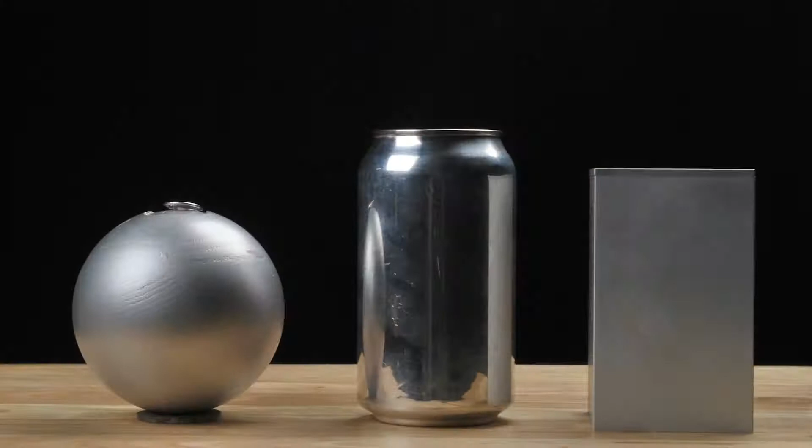But the cuboid surpasses the sphere in packing efficiency. It has almost no wasted space, although at the sacrifice of using more surface area to contain the same volume as the sphere. So, to create a can, engineers use a cylinder, which has elements of both shapes. From the top, it's like a sphere, and from the side, it's like a cuboid. A cylinder has a maximum packing factor of about 91%, not as good as the cuboid, but better than the sphere. Most important of all, the cylinder can be rapidly manufactured.

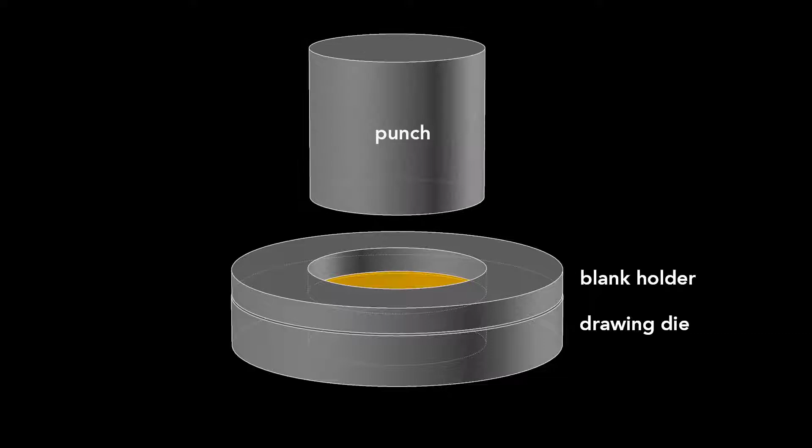The can begins as this disc called a blank, punched from an aluminum sheet about 3/10 of a millimeter thick. The first step starts with a drawing die, on which sits the blank and then a blank holder that rests on top. We'll look at a slice of the die so we can see what's happening. A cylindrical punch presses down on the die, forming the blank into a cup. This process is called drawing.

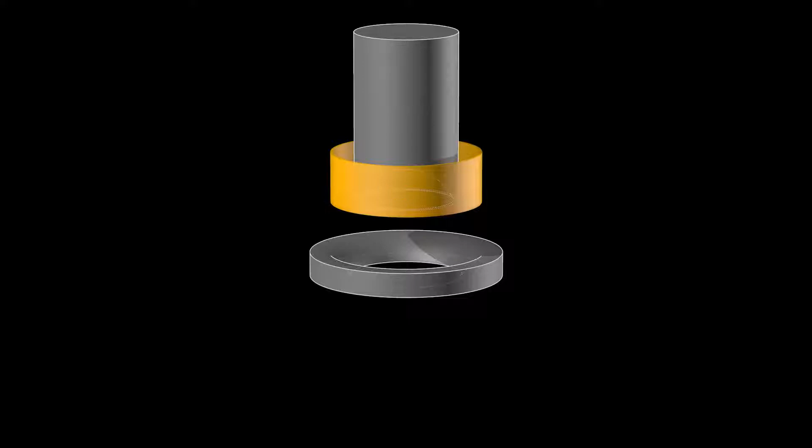This cup is about 88 millimeters in diameter, larger than the final can, so it's redrawn. That process starts with this wide cup and uses another cylindrical punch and a redrawing die. The punch presses the cup through the redrawing die and transforms it into a cup with a narrower diameter, which is a bit taller. This redrawn cup is now the final diameter of the can, 65 millimeters, but it's not yet tall enough. A punch pushes this redrawn cup through an ironing ring.

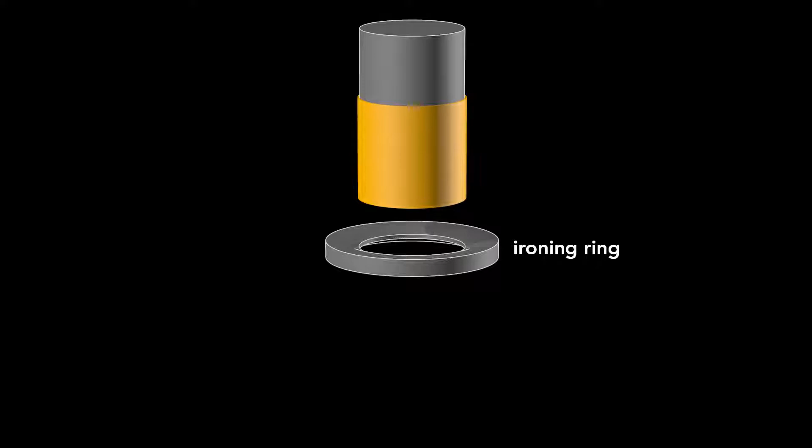The cup stays the same diameter as it becomes taller and the walls thinner. If we watch this process again up close, you see the initial thick wall and then the thinner wall after it's ironed. Ironing occurs in 3 stages, each progressively making the walls thinner and the can taller.

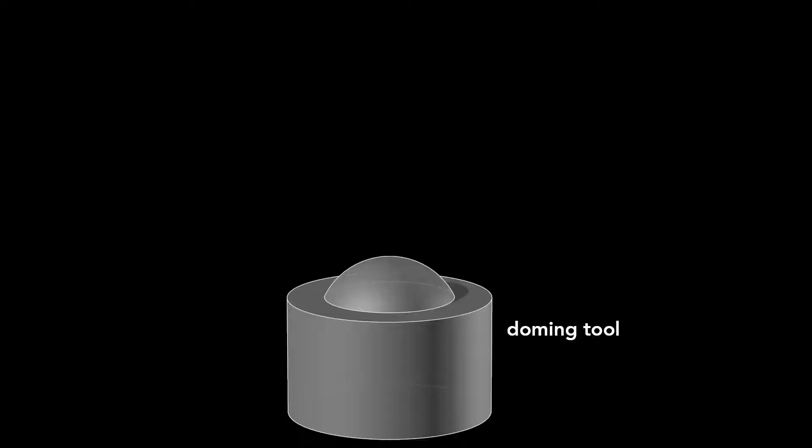After the cup is ironed, the dome on the bottom is formed. This requires a convex doming tool and a punch with a matching concave indentation. As the punch presses the cup downward into the doming tool, the cup bottom then deforms into a dome. That dome reduces the amount of metal needed to manufacture the can. The dome bottom uses less material than if the bottom were flat.

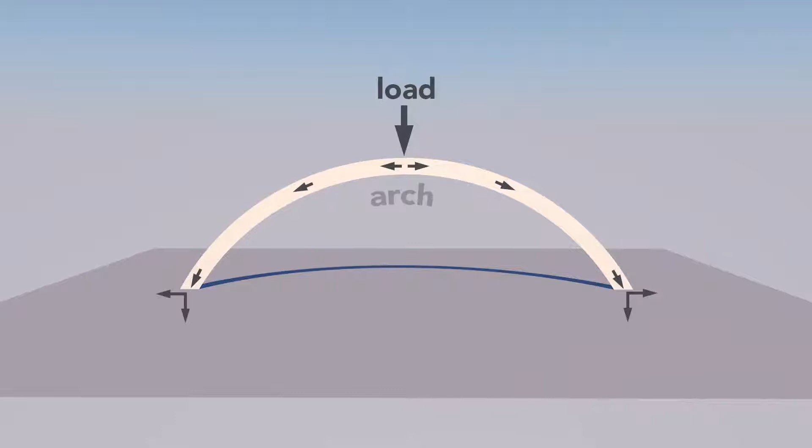A dome is an arch revolved around its center. The curvature of the arch distributes some of the vertical load into horizontal forces, allowing a dome to withstand greater pressure than a flat beam.

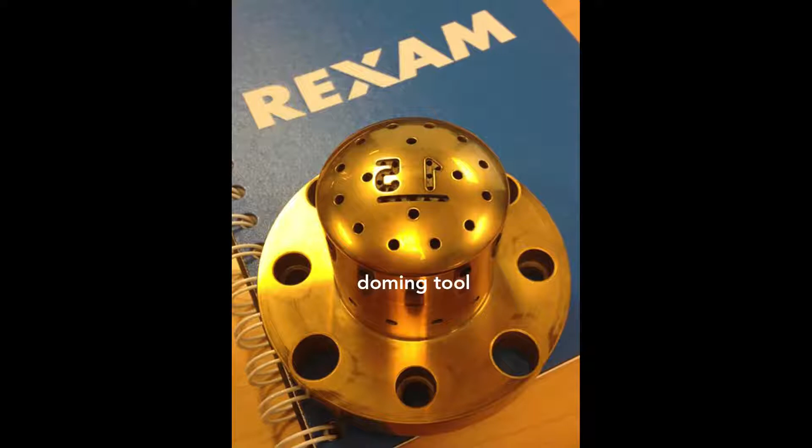On the dome, you might notice 2 large numbers. These debossed numbers are engraved on the doming tool. The first number signifies the production line in the factory, and the second number signifies the body maker number. The body maker is the machine that performs the redrawing, ironing, and doming processes. These numbers help troubleshoot production problems in the factory. In that factory, the manufacturing of a can takes place at a tremendous rate.

These last 3 steps, redrawing, ironing, and doming, all happen in one continuous stroke and in only 1/7 of a second. The punch moves at a maximum velocity of 11 meters per second and experiences a maximum acceleration of 45 Gs. This process runs continuously for 6 months or around 100 million cycles before the machine needs servicing.

Now, if you look closely at the top of the can body, you see that the edges are wavy and uneven. These irregularities occur during the forming. To get a nice, even edge, about 6 millimeters is trimmed off of the top. With an even top, the can can now be sealed. But before that sealing occurs, a colorful design is printed on the outside. The term of art in the industry is decoration.

The inside also gets a treatment. A spray-coated epoxy lacquer separates the can's contents from its aluminum walls. This prevents the drink from acquiring a metallic taste and also keeps acids in the beverage from dissolving the aluminum.

The next step forms the can's neck, the part of the can body that tapers inward. This necking requires 11 stages. The forming starts with a straight-walled can. The top is brought slightly inward, and then this is repeated further up the can wall until the final diameter is reached. The change in neck size at each stage is so subtle that you can barely tell a difference between one stage and the next.

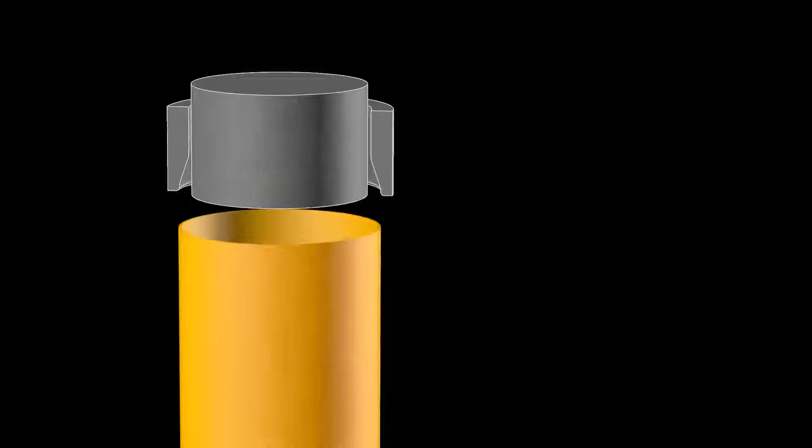Each one of these stages works by inserting an inner die into the can body, then pushing an outer die, called the necking sleeve, around the outside. The necking sleeve retracts, the inner die retracts, and the can moves to the next stage. The necking is drawn out over many different stages to prevent wrinkling or pleating of the thin aluminum.

Since the 1960s, the diameter of the can end has become smaller by 6 millimeters, from 60 millimeters to 54 millimeters today. This seems a tiny amount, but the aluminum can industry produces over 100 billion cans a year, so that 6 millimeter reduction saves at least 90 million kilograms of aluminum annually. That amount would form a solid cube of aluminum 32 meters on a side. Compare that to a 787 Dreamliner with a 60-meter wingspan.

Now, after the neck has been formed, the top is flanged. That is, it flares out slightly and allows the end to be secured to the body, which brings us to the next brilliant design feature, the double seam. On older steel cans, manufacturers welded or soldered on the ends. This often contaminated the can's contents. In contrast, today's cans use a hygienic double seam, which can also be made faster.

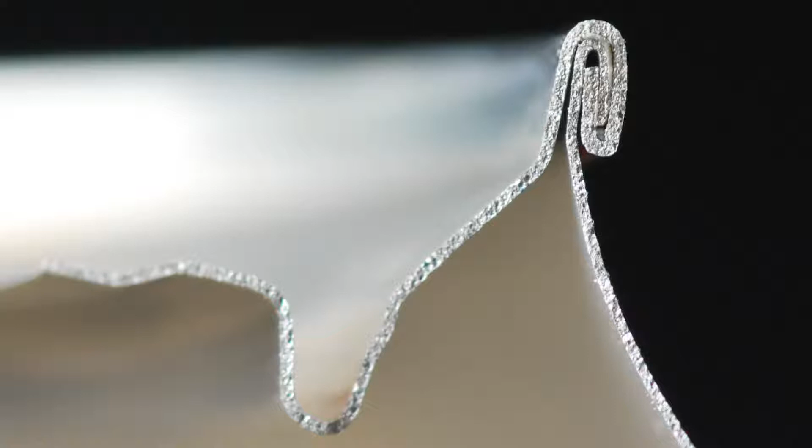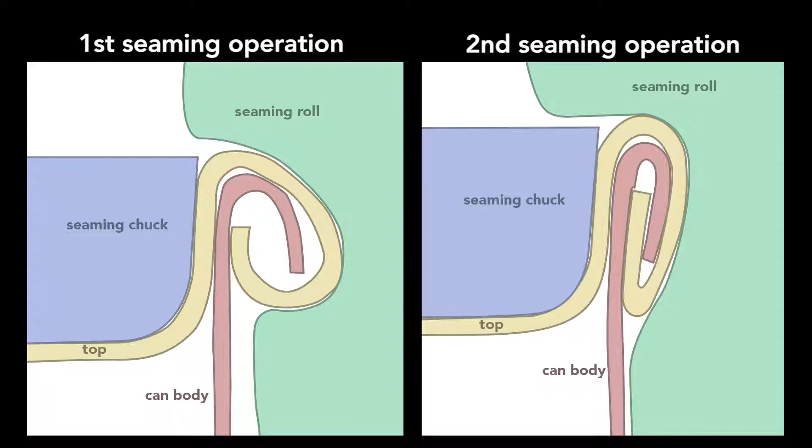This can is cut in half so you can see the cross-section of the double seam. To create this seam, a machine uses two basic operations. The first curls the end of the can cover around the flange of the can body. The second operation presses the folds of the metal together to form an airtight seal. While the operations themselves are simple, they require high precision. Parts misaligned by a small fraction of a millimeter cause the seam to fail.

In addition to the clamping of the end and can body, a sealing compound ensures that no gas escapes through the double seam. The compound is applied as a liquid, then hardens to form a gasket. The end, attached immediately after the can is filled, traps gases inside the can to create pressures of about 30 psi or 2 times atmospheric pressure. In soda, carbon dioxide produces the pressure. In non-carbonated drinks like juices, nitrogen is added.

So why is a beverage can pressurized? Because the internal pressure creates a strong can despite its thin walls. Squeeze a closed, pressurized can, it barely gives. Then, squeeze an empty can. It flexes easily; the can walls are thin, only 75 microns thick, and they're flimsy. But the internal pressure of a sealed can pushes outwards equally and so keeps the wall in tension.

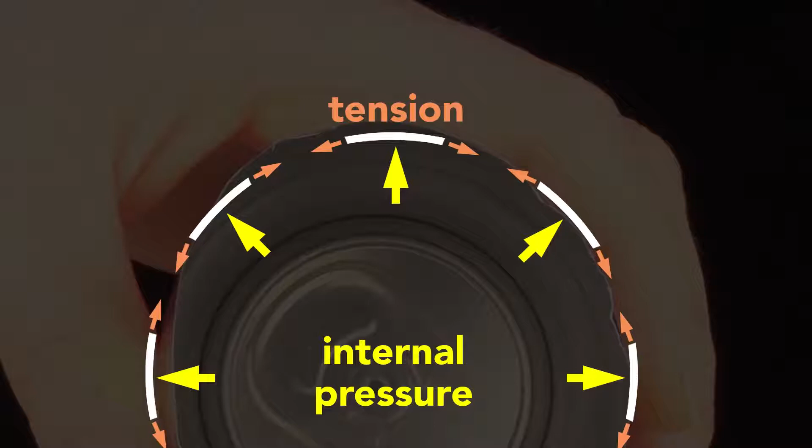This tension is key. The thin wall acts like a chain. In compression, it has no strength, but in tension, it's very strong. The internal pressure strengthens the cans so that they can be safely stacked. A pressurized can easily supports the weight of an average human adult. It also adds enough strength so that the can doesn't need the corrugations like in this unpressurized steel food can.

While initially pressurized to about 2 atmospheres, a can may experience up to 4 atmospheres of internal pressure in its lifetime due to elevated temperatures, and so the can is designed to withstand up to 6 atmospheres or 90 psi before the dome or the end will buckle.

Why is there a tab on the end of the can? It seems a silly question. How else would you open it? But originally, cans didn't have tabs. Very early steel cans were called flat tops for pretty obvious reasons. You use a special opener to puncture a hole to drink from and a hole to vent. In the 1960s, the pull tab was invented so that no opener was needed.

The tab worked like this. You lift up this ring to vent the can and pull the tab to create the opening. Easy enough, but now you've got this loose tab. The cans ask you to, please don't litter, but sadly these pull tabs got tossed on the ground where the sharp edges of the tabs cut the bare feet of beachgoers or they harmed wildlife. So the beverage can industry responded by inventing the modern stay-on tab.

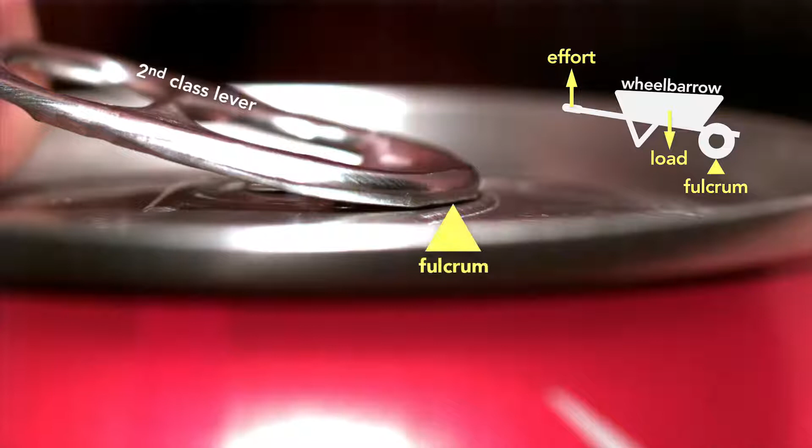This little tab involved clever engineering. The tab starts as a second-class lever. This is like a wheelbarrow because the tip of the tab is the fulcrum and the rivet the load. The effort is being applied on the end. But here's the genius part. The moment the can vents, the tab switches to a first-class lever, which is like a seesaw, where the load is now at the tip and the fulcrum is the rivet.

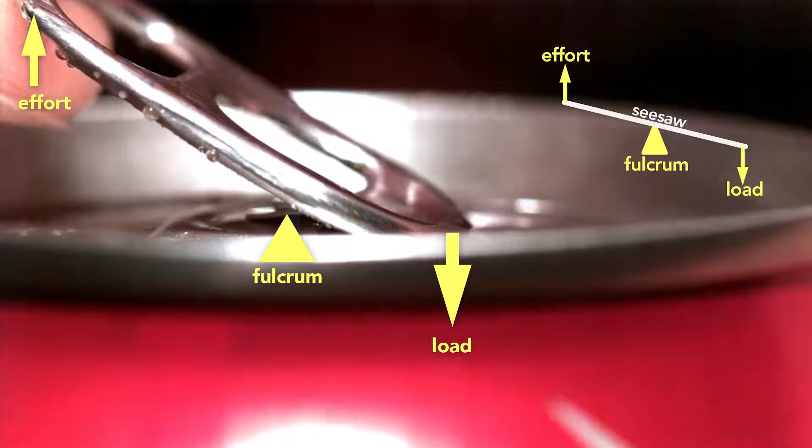You can see clearly how the tab, when working as a wheelbarrow, lifts the rivet. In fact, part of the reason this clever design works is because the pressure inside the can helps to force the rivet up, which in turn depresses the outer edge of the top until it vents the can, and then the tab changes to a seesaw lever.

Looking from the inside of the can, you can see how the tab first opens near the rivet. If you try to simply force the scored metal section into the can using the tab as a first-class lever with the rivet as the fulcrum throughout, you'd be fighting the pressure inside the can. The tab would be enormous and expensive.

The aluminum beverage can is so ubiquitous that it's easy to take for granted. But the next time you take a sip from one, consider the decades of ingenious design required to create this modern engineering marvel. I'm Bill Hammack, the Engineer Guy.